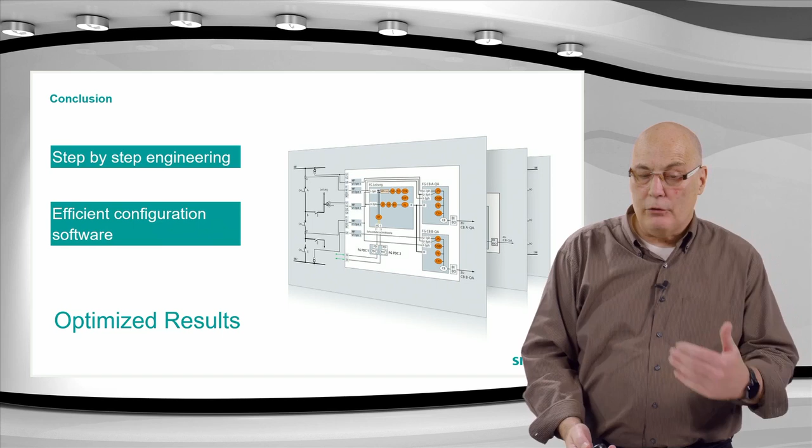Right, that's showing step-by-step engineering. You apply the two functions, you get an efficient result. In your process data, you also get information like impedance protection trip or distance protection trip. You know exactly what is going on everywhere.

All right, that brings us to, I think, our final topic for today, or this morning: teleprotection. Teleprotection is a very effective supplement or add-on to the distance protection.

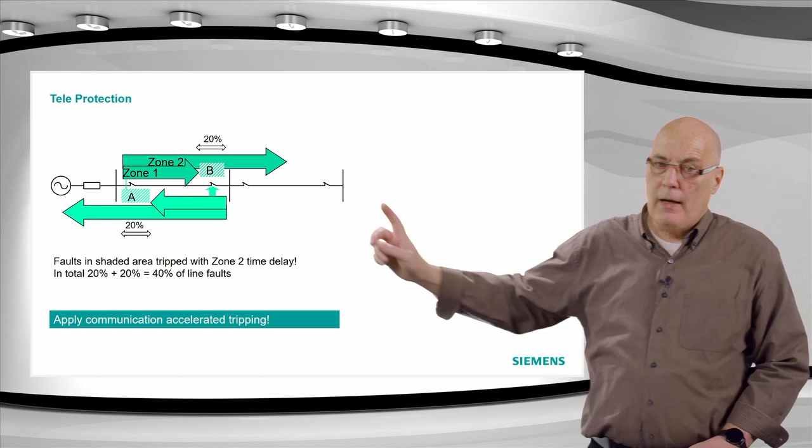What can we see here? We can see a normal line, and as we saw this morning, zone 1 is typically 80%. That means you've got a safety margin over there, B, and a safety margin A from the other side. Both of those are about 20%. So if you look at the total line length, those two shaded areas sum up to 40%, almost half the line. So if you assume your line faults, purely statistically, almost half the faults you have will be either in A or in B, if your faults can be anywhere.

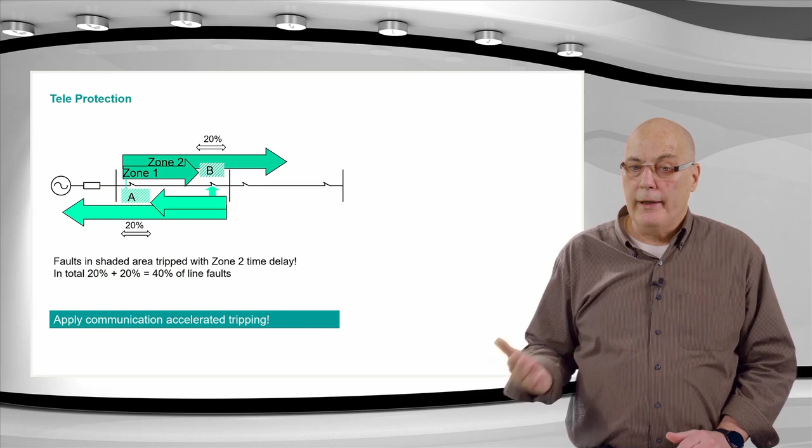That means half the faults on your line are not tripped instantaneously, because for a fault at B, we will have a zone 2 trip on the A side, and for a fault at A, in that shaded area, we will have a trip in zone 2 from the B side. It means the fault from either side, one of the sides will be delayed tripping. Delayed tripping is not good for power quality, system stability, and many things. We want to try and avoid that, and teleprotection gives us a technique to do that.

Again, in the DIGSI project tree, you can see there are a number of teleprotection schemes. You can see the teleprotection scheme: distance protection 85-21 are your distance protection teleprotection schemes. You get a blocking scheme, reverse interlocking scheme, permissive overreach, permissive underreach - 4 different schemes. The reverse interlocking scheme is added here.

That's what we spoke about just now when we did the transformer protection. Remember, for the LV busbar, the 20 kV busbar, the zone 1 with the reverse interlocking from the feeders - that's this scheme over here. It's applied as a teleprotection scheme because essentially you have the zone 1, which is controlled by the feeder with a reverse interlock signal. So it's an external signal you couple into your distance protection. We call it teleprotection, but it's not going to be considered here.

The schemes we consider here are for normal feeders, and for those we have the blocking, permissive overreach, and permissive underreach. What you also see is 67N, the directional ground fault. Directional ground fault can also be applied with a directional scheme, and the combination of the directional ground and the distance protection can be very, very effective.

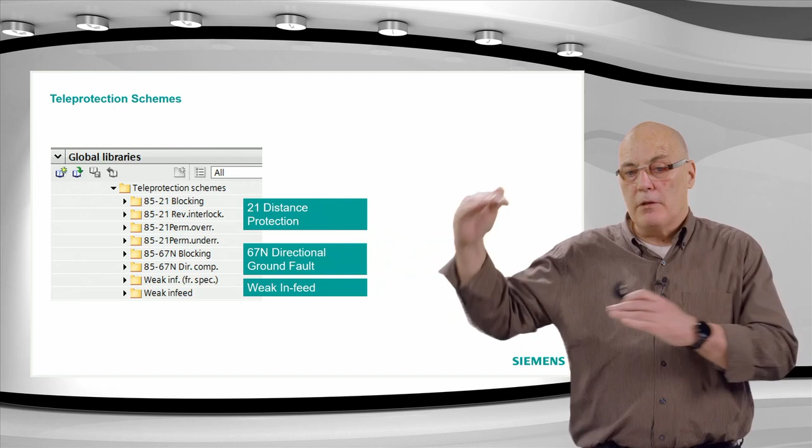Especially, we spoke about it this morning, fault resistance. At some point, the fault resistance, if it's a high resistance fault - that's why we sometimes refer to 67N as a high resistance fault protection or high ground fault resistance protection - then it goes beyond what the distance protection should be set to. Remember, we don't want to set the resistance reach of the distance zone too big. Remember, the symmetry requirements, X to R and so on, are limited. If you run into difficulties with the R to X of a distance protection, don't try to overstretch this. Say, okay, I accept the boundary for the distance protection and I use the 67N to take over for the resistance, because it is very, very effective for high resistance ground faults, also with the teleprotection scheme.

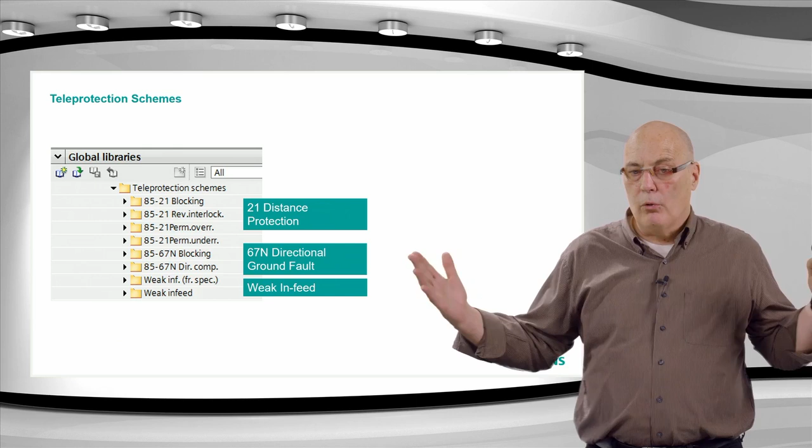And at the bottom, weak infeed. Obviously, as I spoke about with the renewables, for example, I said it will typically be weak infeed. You get also other weak infeed conditions. With teleprotection, you combine a weak infeed logic, which will improve your tripping speed overall on both sides. So you can get, even at the weak infeed side, a fast fault clearance to remove the system.

I wonder, did I do two slides now? No, it was just a...

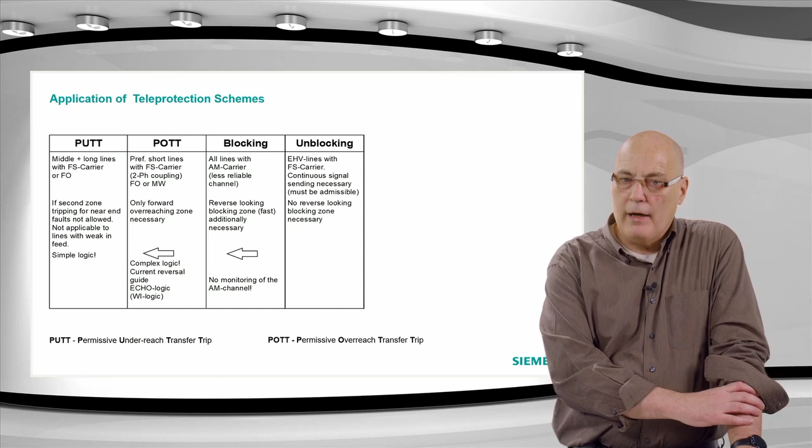All right, the 4 schemes that we are typically looking at with distance protection: PUTT, permissive underreach transfer trip; POTT, permissive overreach transfer trip. Then we have a blocking scheme and the unblocking scheme.

The unblocking scheme, I want to initially take care of that. That is really not a blocking scheme - it is more a POTT scheme essentially, but it uses a special carrier situation where you have a monitoring channel on your communication system. It is a special way of using the communication system. That's why I want to leave that a little bit aside.

The 3 schemes we're really looking at initially are the PUTT, POTT, and blocking, starting with the blocking scheme. The blocking scheme, as you can see in the title here, talks about AM carrier. It is not restricted to that, but it gives a little bit of the background.

Why do we use a blocking scheme, and what is a key situation where you could say the blocking scheme is important to me, I want to use it? It depends on your communication. The important thing is, if you use a blocking scheme and you have an internal fault, remember that's the definition of the blocking scheme.

When the fault is internal and you want to trip, you are not requiring communication. That means if your communication system has difficulty getting the signal through a fault - remember sometimes the communication goes on the power line, like the power line carrier, you can see the AM carrier referred to here - you need to get the signal through, and this signal might have difficulty getting through a faulted line. So if the line is healthy, the blocking scheme would communicate and you can be sure the signal will go through, because it's only sending a signal when the fault is external. Then the line is healthy and the blocking signal can go through a healthy line and be received and blocked, and everything is stable.

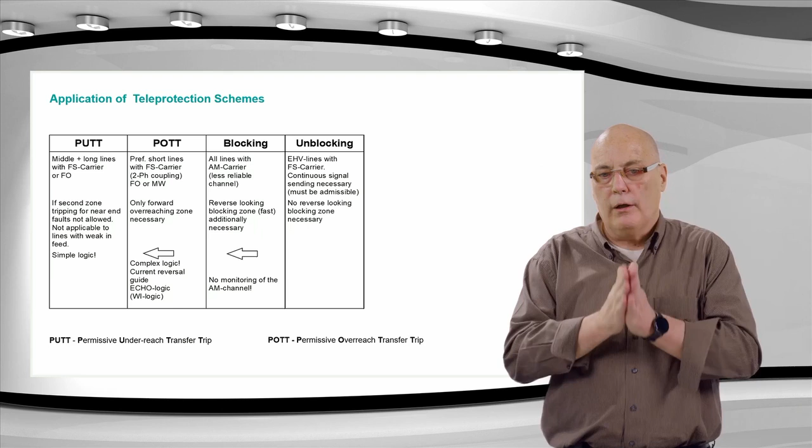So the point is, the blocking scheme is essentially applied where you have got difficulty or you cannot be sure that your communication system will work if the internal fault is there. Then you simply say, all right, I don't care if the fault is internal, I don't need a signal, so I'm going to trip. I only want to be stable on external faults, so I need a healthy line to send a blocking signal through a healthy line.

What is the problem with zone 1? On short lines, the X setting is small, and due to our X to R ratio, the R setting is also small. We don't get a secure resistance reach on short lines with zone 1. Remember, there's a situation of tower footing resistance, the weak infeed, and so on. It's not very dependable on short lines. That's why you can see the PUTT scheme is not good there. On middle length or long lines, where you've got a fairly good zone 1 setting, you can have a good resistance reach. It's extremely simple because you only send when you have tripped.

All right, so I've looked at these schemes, blocking and PUTT, which come with certain compromises. In the middle, we've got the POTT scheme. The POTT scheme always works, if you assume your carrier will get through a faulted line. That's why you can see using special frequency shift modern carriers - the AM carrier is an older type of carrier system, not used nowadays at all I don't think, very... well not cheap, it's just older, all right? But the frequency shift carrier, you can be dependable that you will get through the fault. Also, if you couple the carrier onto two phases, that gives you a better coupling of your carrier signal to the line. You will get a dependable signal through the line, even if it's faulted.

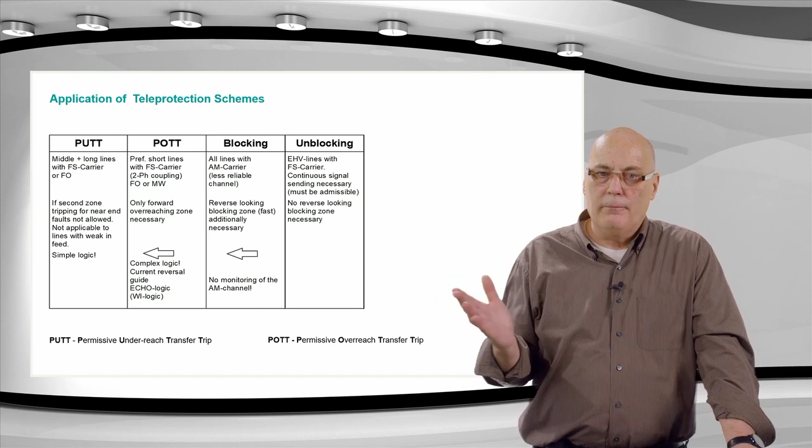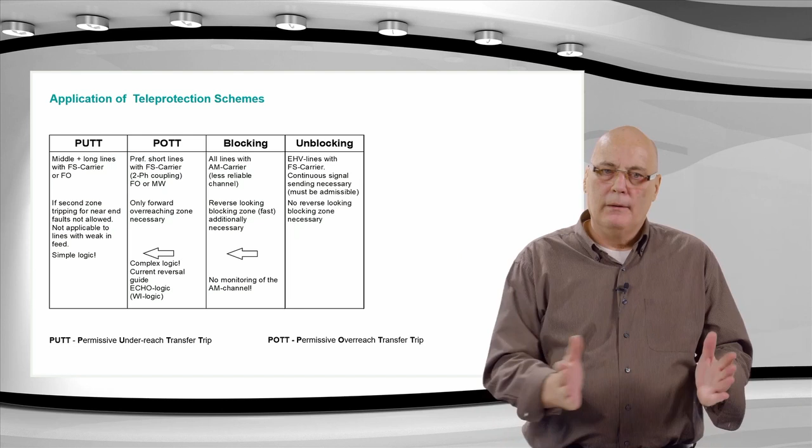So that's really summarizing it. PUTT: extremely simple, but short lines are difficulty. Blocking: you get slightly slower tripping always, but it works even if your carrier system is very poor. POTT scheme works everywhere, but is more complicated. Okay, that's what one should just consider.

So there's just a little logic diagram of this, I don't want to spend too much time on this. You can see here, this is a PUTT scheme. Zone 1, your underreaching zone, is applied here - it's the one that's going to transmit the signal. And if you receive the signal over here, you would simply use an overreach, you'd release an overreaching zone to trip immediately. Basically it's just very, very simple - you could almost take the received signal and trip directly.

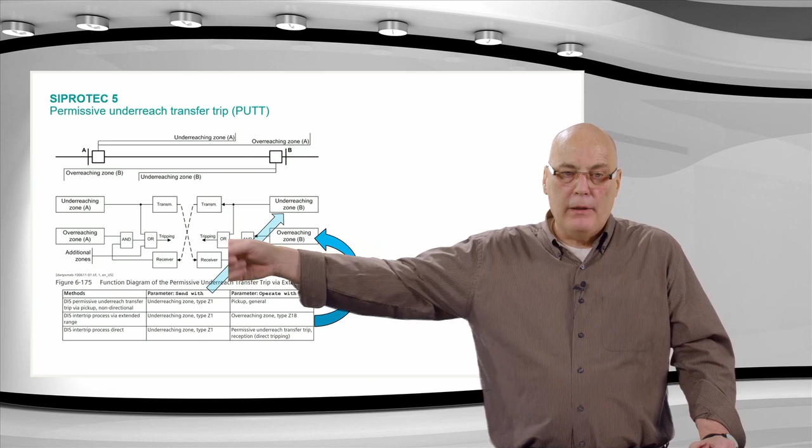You don't do this because there is always a risk of a mistake by the communication - if the communication sends you an unwanted command, just by accident, and there are some probabilities statistically, I don't know whether 10 to the minus 4 or 5 is the probability. So if you've got 10,000 power line carrier systems, you'll get about one unwanted command per year or something like that. If it then directly trips, that would not be good, even if it's only happening once a year. So you put that received signal into a zone 1B overreaching zone release, and that means the chances of that unwanted command coming from one of your 10,000 relays once per year and an overreaching zone pickup at the same time, that's not likely - that's like winning the lottery three weeks in a row, effectively.

All right, the POTT scheme looks almost the same, only now we are using an overreaching zone to send. You can see with the receive signal, the release is the same. Again, the receive signal would release your directional overreaching zone. So it is like a direction comparison.

If you have an internal fault, then both sides, zone 1B will pick up. One side sends, the other side sends. They're both sending, both receiving, and they have a pickup forward.

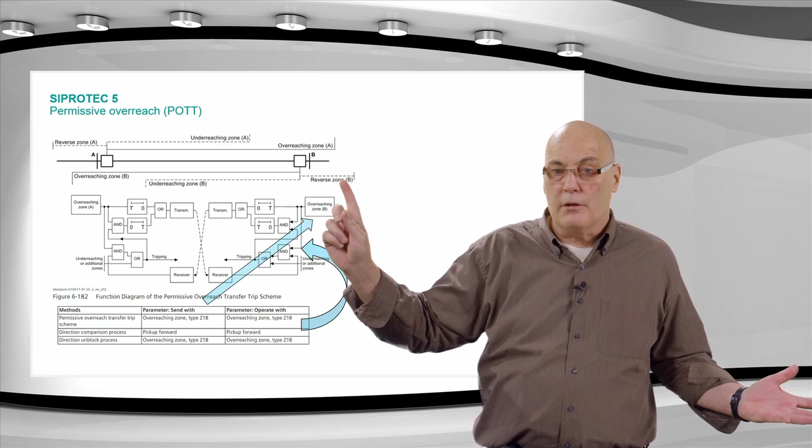It's a trip. If the fault is reverse, over here, the remote side would see it and zone 1B would send. The local side would not see it in its forward zone, would not trip. The local side would not send, but it's reverse. So only one side sends here, and the receiving side will not see the fault in its zone 1B and no trip. So the system is stable.

Also, it's a direction comparison scheme in effect, not exactly, but almost.

Blocking scheme is a little bit different. Here you can see there's some logic over here. Pick up forward would block it. Be careful here: pick up forward goes into an inverting input, so it's going to block the send. So you have a pickup that wants to send, but if it's a forward pickup, you will not send through the AND gate. It's blocked. So you will only send any pickup, so very sensitive, but not forward.

So every reverse fault you see, you will send a blocking signal. On the remote side, when you receive the blocking signal over here, you're going to go in and prevent the tripping. The receive signal comes here, inverts the input to the AND gate, and the AND gate is blocked. You cannot trip.

You need some time. Now the problem is when you get the pickup and you immediately want to trip, that would be too soon. You have to wait for the receive signal. That's where you have this coordination time here. You are waiting. That's the T. You're waiting for the channel delay time, plus some safety margin, to give the remote side time to send you the block signal. If you don't have the block signal when this timer expires, the blocking scheme will trip.

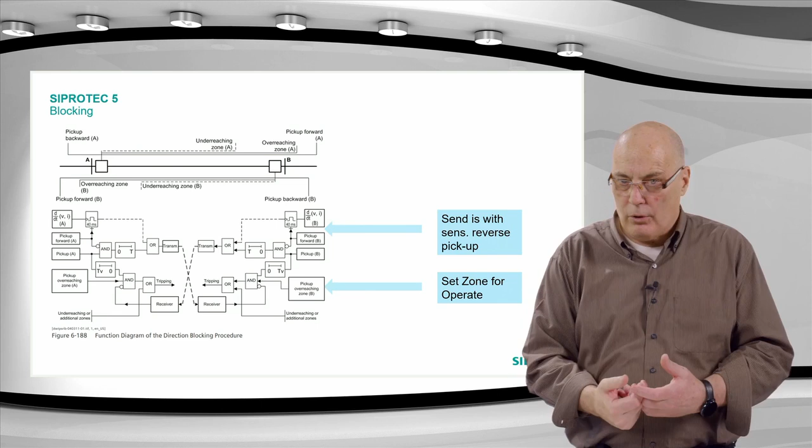And then you see at the top here an add-on which is not classic blocking scheme. It's an option that you can apply together with a blocking scheme called jump blocking. The jump blocking will send immediately at fault inception. That is extremely fast, about maybe 15 milliseconds faster than normal pickup, but it comes on a sampled value immediately.

It does not have to filter out anything. It comes on the delta at the fault inception. You can see the delta. So it's approximately 15 milliseconds faster than the pickup here. That can send immediately, but it's not directional. It's just saying send immediately.

And that way you would get the receive here very quickly. If the channel delay is 15 milliseconds, you get the receive at the same time as the pickup. That means you could, in theory, change this time TV to approximately 0, because your jump blocking will be here when you get the pickup. Normally you can reduce the time. I wouldn't necessarily set it to 0, depending on how fast your channel is, but you can reduce it.

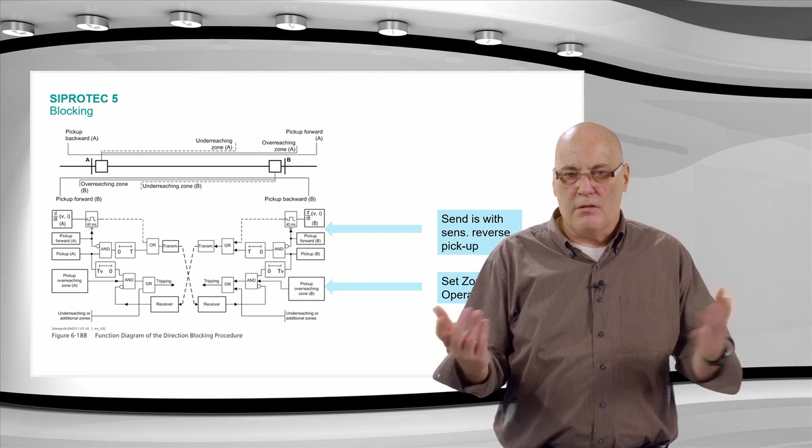The technique is like this: if the fault is reversed, then this blocking here would be taken over by this blocking and the blocking signal continues, and you won't trip. If the fault, however, is forward, the forward detection will reset the jump. Immediately, as soon as you see forward, you take away the jump block send. That means that on the other side, the receive signal will be taken off. And as soon as the receive signal drops out, you can then trip. So it is just an add-on to make it possible to set this timer a little bit shorter. You don't need it, but it can be used.

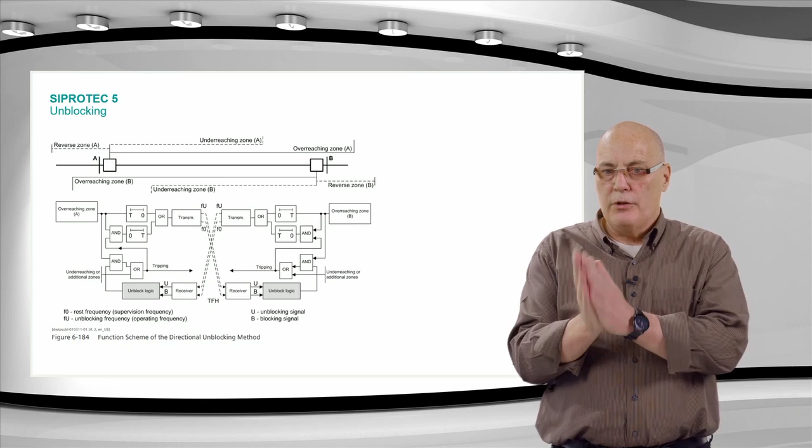It means you've got your 0. F0 is a frequency which is your monitoring or blocking frequency. As long as you receive F0, the receive block is happy, says the channel is healthy, is ready. If the F0 disappears, it's going to say, okay, it could be a fault.

It'll have a certain time. If the unblocked receiver is then received, then it'll say, okay, I have dropped out F0, I've picked up FU. I will release and can release the tripping, essentially like a POTT scheme.

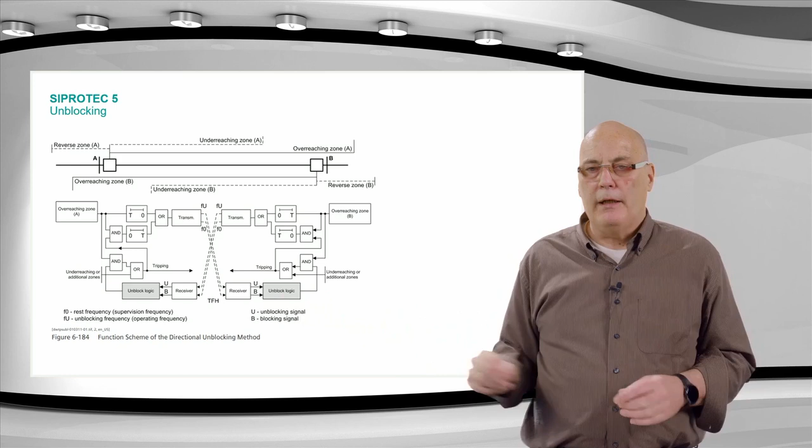If however the F0 disappears and FU does not come, then there's a certain timer here, and it will say, oops, somehow the carrier has failed, the communication has gone away. The F0 has disappeared, I'm receiving nothing, I'm not receiving FU or F0 - channel failure. It'll give you a channel failure alarm, and the logic will deal with the communication failure. That's just a different technique of doing it. That is a different receive block as such.

So the teleprotection is extremely important here, and the other thing that can happen on these double circuit or multi-circuit lines, you get inter-system faults. For this example, same voltage potential, maybe they were actually coupled on both sides as well, and you get a fault, A ground on one tower and B ground on the other tower. It's probably an inter-system fault where they flash over to the tower, and the arc on the tower burns into the other line.

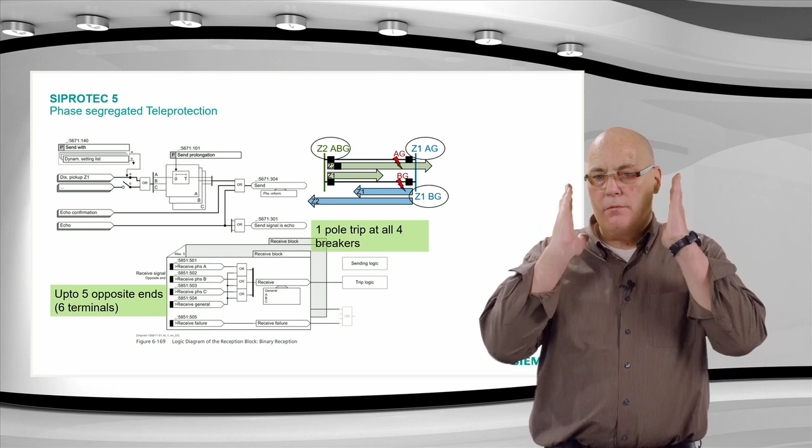So you get this. Normally, if these were 2 independent lines, not on the same tower, the chances of a fault A ground, B ground happening simultaneously is very, very remote. But if it's the same tower, meaning 2 circuits on one tower, then this type of fault is not so remote, can happen. We want to get phase selective single pole tripping on both feeders, because if we trip both feeders 3-pole, that would be a really bad interruption of the system, because we would maybe lose complete interconnection of the 2 stations.

If we get a single pole trip on both feeders, then the 2 stations are still strongly connected. You can get a lot of power transfer between the 2 stations. They will remain synchronous. The stability is much, much improved. All right, how can one do this?

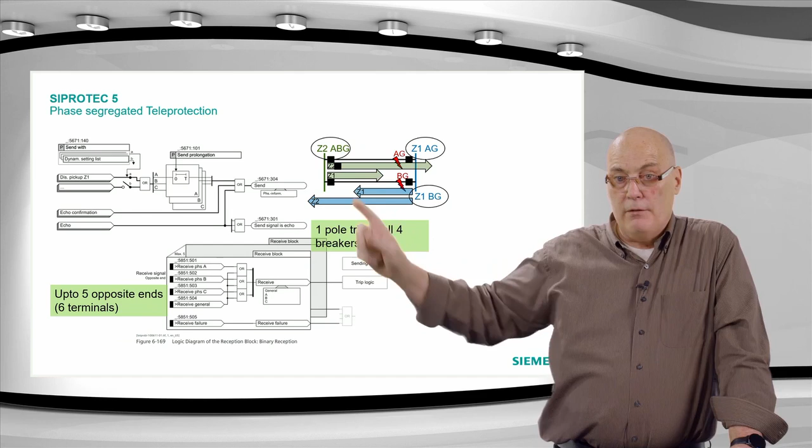You can see on this side, if it's all coupled on both sides, then there will be a pickup here, zone 2, AB ground. These 2 relays would pick up phase to phase to ground and would want to trip 3-pole inside there, zone 2, because it's a remote fault. These 2 sides would see A ground and B ground single phase forward, zone 1 trip, and then if you use a teleprotection, either PUTT could be used here because of the zone 1 pickup, or also a POTT.

As such, these remote sides would send a phase segregated signal - I'd say this one would send a B release and the other would send an A release. On the receiving side, they would say, although I have a pickup AB ground, I only get a release for A, so I would trip single phase. So you can get single pole tripping at both sides for this condition here.

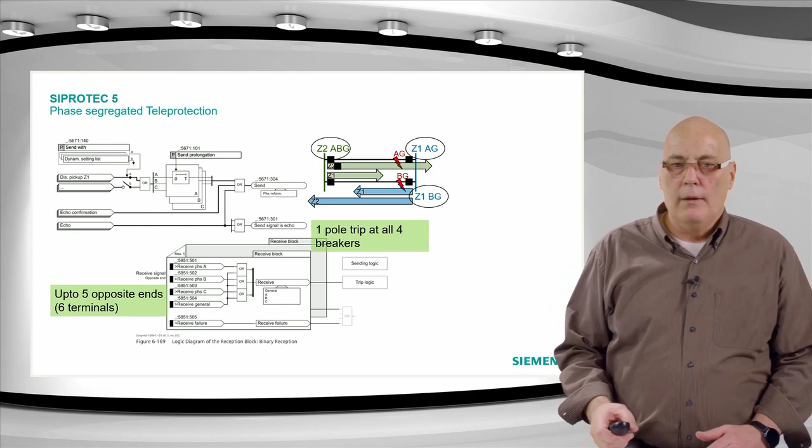And that's, as I say, done in the logic independently. You can do this with binary inputs, or as we'll see later on, with the built-in serial communication. So you have a choice. You can do this phase selective tripping with binary inputs or with a protection interface. A protection interface is the serial interface in the relay. This could also be an Ethernet interface nowadays.

For a while now, more than a year already, you have the BD module. You can put the protection interface over IP, use a BD Ethernet module to get the communication, but that's a different subject.

Okay, so the way in which your protection interface is configured doesn't really matter. That's an internal serial or IP interface to the remote end, and you can put your signals through this interface, or you can put the signals through contacts and binary inputs in the classic sense. Both of those can be phase selective, as you can see here. The binary inputs - you can see there's receive ABC, you define each one independently, and further up there would be send signals also individually, ABC send, which you can route independently.

If you use a PI, it will automatically be phase selective. So in the PI protection interface, you don't have to set anything special to be phase selective. It is automatically phase selective, the PI interface.

Transient blocking, that's a nice subject here which one can talk about for a while. It is important for the permissive overreach scheme. Remember we said we have the condition that we will be sending on the external fault.

So here I've taken an example. At the top you can see two feeders. It does not have to be a double circuit, but on the double circuit this problem is more probable because of the mutual coupling we talked about earlier on, that during the second condition at the bottom, the mutual coupling will pull this fault closer to the relay location, but that's something else one can talk about, a bit technical.

On a simple level, the transient blocking is important so that the relay here remains stable, the top feeder remains stable and does not trip during this reverse fault, even though this reverse fault for the top feeder is going to be cleared sequentially. That breaker remains in while this one trips.

Let's go through it step by step. Initially we have the top condition and we apply the fault here. So what happens here initially, we will have a pickup on the right hand side reverse, and on the other side we'll have the zone 2B ground.

So the left hand side at the top will be sending a signal. Here we will be receiving the signal. And this side at the bottom will see the fault here outside zone 1, so maybe the teleprotection is not working so quickly, and then we go over to this condition trip, and now things reverse.

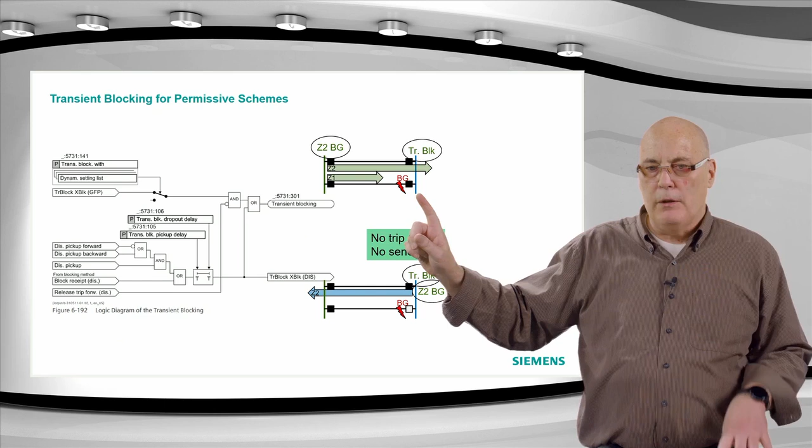And if the time delay is exceeded, then you would expect that must be a reverse fault. The time delay you set on the pickup delay is the typical breaker time here. So you're saying, I'm seeing a reverse fault, I'm expecting this breaker here at the bottom to trip. So I'm just going to wait the time of the breaker, and if I've seen it for that duration, typically about 20 milliseconds, then I will be sure that there's definitely a reverse fault, not something transient, and I will activate the transient blocking.

If now this breaker really does trip, then the transient blocking is active and it will not drop out instantaneously. You have a block hold delay, which is typically set to around about the channel delay times two, typically about 50 milliseconds you set here. So for a further 50 milliseconds you'll keep the transient blocking active.

That means even though you have a zone 2 pickup now, and you may still have a receive which has not yet reset, you will not trip with the POTT scheme because the transient blocking prevents it. And you will also not send a signal — that's the other interesting part. Normally here the zone 2 pickup will send a signal, but the zone 2 pickup with the active transient blocking, there will be no send signal.

It really sounds more complicated than it is. It's really fairly straightforward.

One other aspect we still need to look at quickly is the weak infeed. The weak infeed really has 2 aspects: the echo and the trip. The echo is clear: if you have a weak infeed condition, you want to tell the strong infeed, look, I'm not seeing the fault, but it's definitely not reverse or anything, so I'm going to send you an echo and you can trip.

The weak infeed tripping is again more secure, because of the unwanted command issue. If for some reason the remote side sends a signal and there's not really any fault, it's just an unwanted command that the communication equipment did by mistake, we don't want to trip on that.

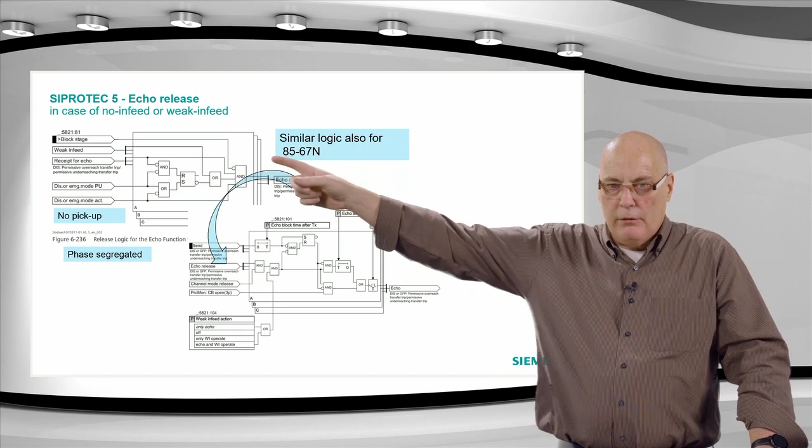If, however, you get a weak infeed condition, but you have a received signal and everything is healthy and there is no pickup, then you would say, alright, I'm getting a received signal, I have no pickup, so for me it looks like I'm a weak infeed because you are receiving, and you would then release the echo, and the echo would then be sent here.

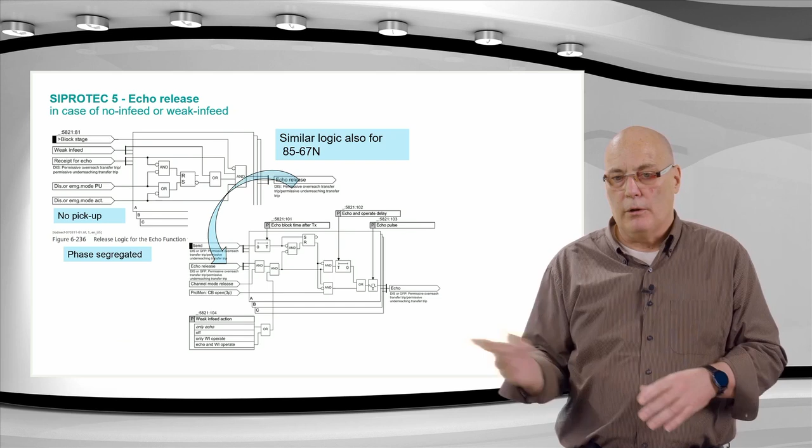There are some stabilizing techniques here to prevent ping pong echoes, where the system locks itself up, one guy receives an echo and then sends it back. There's a timer which says if I have sent a signal, I cannot send an echo shortly afterwards, otherwise you get the system locking up. That's all done internally with the default timers.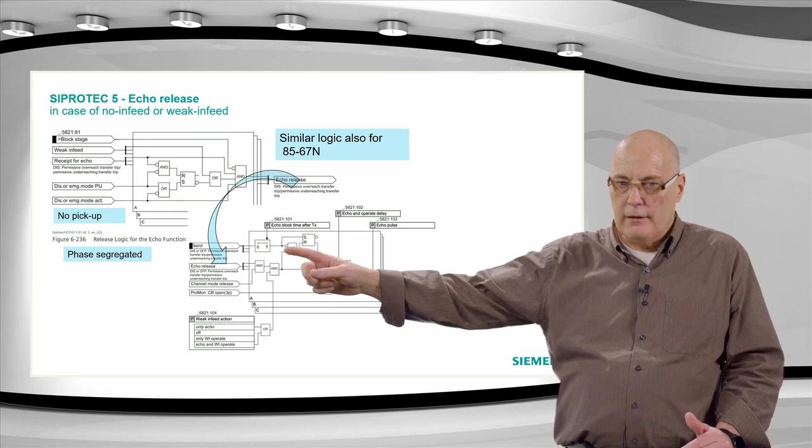So essentially, if you have the no pickup and receive, you can see on the left hand side there's a receive for echo going in there, then no pickup, distance or emergency protection, no pickup, that'll release the echo. And the echo release, if the timing here says there was no send signal, so I'm not echoing my own echo, then it'll release an echo signal out here to allow the tripping.

The thing that we must worry about if we're going to apply the POTT together with some weak in feed is that our zones are set correctly, and we must have a reverse reach. This is a standard teleprotection scheme, whether you're talking about blocking schemes, weak in feed schemes, or echo schemes, you must have the reverse reach which covers the remote forward reach.

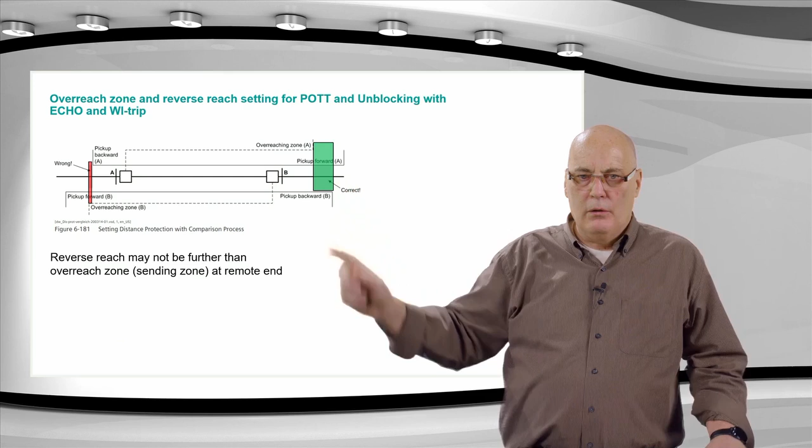On the other side, it's incorrect, because the reverse reach of A is too small. The B side at the bottom reaches all the way to the complete left. The pickup B forward on the remote or left hand side goes further than the A side reverse reach. That's why that red area is not big enough. The reverse reach must exceed the remote forward reach.

And it's important, because if you receive a signal and it's a reverse fault, then you must see at least the same distance reverse as the remote side sees forward.